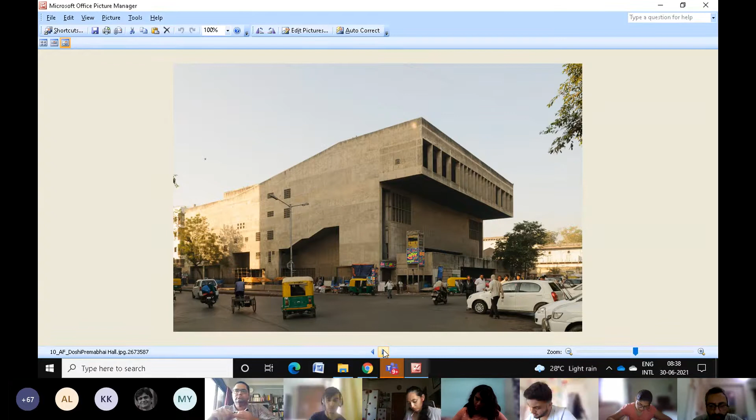But bottom line, Premabhai Hall's presence—though not very monumental—is felt and contributes to the identity of Bhadra Chowk. It has large blank walls flanked on its sides, with discreet openings, and the best part is how such a bold building has merged into the historic context.

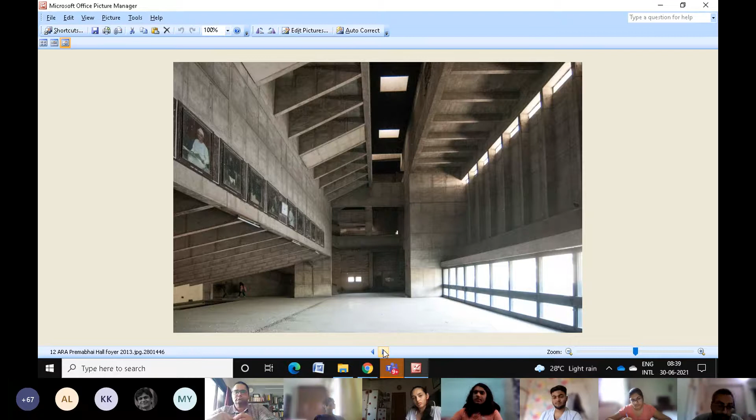The interiors are equally bold. If you look at the seating arrangement to the left, that's the balcony area—you see this cross section in most auditoriums. It has a small cantilever with a tucked-in space as part of the foyer, and double-heighted lobbies that allow you to take a breath, with a long strip window allowing you to look across. I'm trying to show what kind of scale is set here.

Doshi did other buildings earlier, the well-known Tagore Hall—if you've been to Ahmedabad, I'm sure you had a look at this. It also sits in Paldi, but its scale is not that of the neighborhood; it sits among bigger institutional buildings like those designed by Corbusier just opposite, and NID across the street, within the vibrant Paldi neighborhood of elite households.

The early 70s and 80s had their share—Delhi's Sri Ram Art Center, for instance. Most of our cities in the early 70s and 80s got these cultural spaces, modernist buildings of this kind.

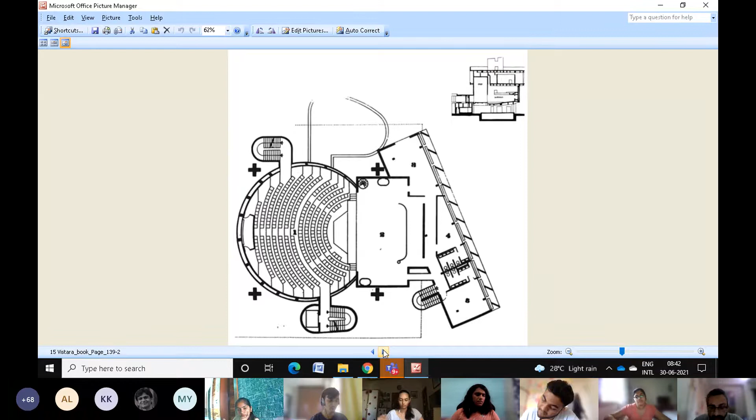But this is a building to be looked at in a manner of how the forms and the function come together to give the entire identity to the building.

There have been a large number of brutalist, modernist buildings. Allen Stein added the India International Centre at Lodi Gardens. All our great masters - Raj Rewal, Doshi, Correa - were practitioners of modernist buildings, and they contributed to that.

I'm not stressing a lot on the kind of modernist building because these buildings actually spoke of the 60s and 70s. However, in order to get the scale right, I did find this San Ginés Cultural Center - again a modernist building. But what interests me is the scale and how it sits in the neighborhood.

If you look at the building, it's a thin, linear building with a small seater auditorium at its rear, and it has plain levels. That is exactly why we've taken this kind of function, because half the building goes below the ground - the basement is equally important.

Learning about basements and rafts is important because some of its services, entry points, part of the auditorium, part of the stage - all these areas go below the ground. If they go below the ground, you're able to also work with the height of the building, so you're able to set the scale of the building.

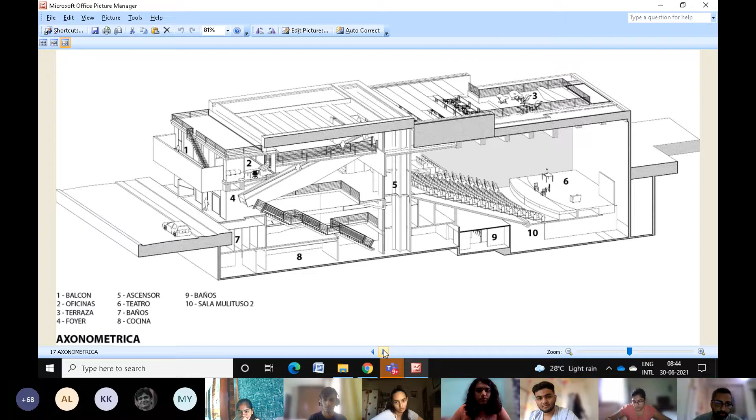Don't forget, how you'd look at this, you wouldn't understand that this is a huge auditorium block that is overpowering. No, this looks like a building that all can access. It's a building whose scale has been very carefully worked out to work for the neighborhood.

I gather that most of our students are in places that cannot afford large, sprawling, loud buildings because they are small two-tier towns. If you're in a two-tier town, you may have to get the scale of the building right, so that it doesn't overpower everything in its vicinity. Though we're seeing malls coming up in all our neighborhoods, and they take everything away - not to forget that they don't have any great architectural character or identity whatsoever.

I thought this is a fine example that spoke about how a large volume could be tucked into the ground and yet it worked well.

It has a vibrant lobby area in the front, other than the auditorium at the back. It has this very stark ramp. It has an office block - a small office block for the locality.

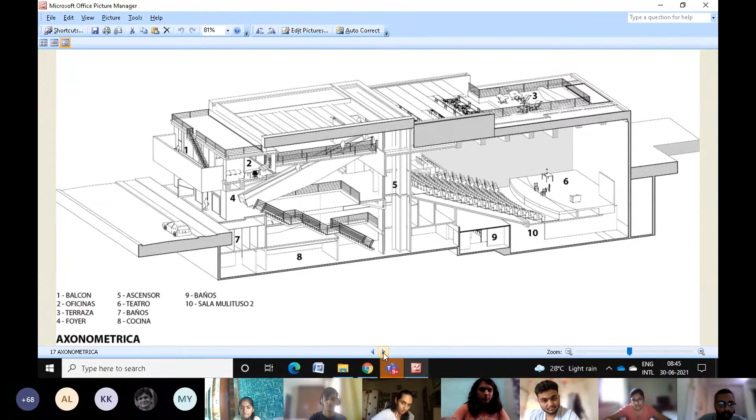What we're seeing as number two is a small office block that sits there. What you're seeing as four is a foyer with a large concrete ramp that takes you up, and a bridge that connects on the other side, and then the roofing system - a very interesting roofing system that allows the light to come in.

I'm showing this particularly one for the scale, the other for the use - a very distinct understanding and use of material and structural system.

We worked last year with a technology studio, and we found that it comes very naturally to students when they say that they want to use rough concrete - they do not want to plaster their surfaces, they'd like to work with form finish concrete, as it's called. If you're noting it down - form finish concrete.

We've had a legacy of form finish concrete, thankfully, because of Corbusier. You saw Premabhai Hall - entirely form finish concrete. Even the Sri Ram Center, and they got the identity of brutalist architecture because of the kind of character those buildings presented. They didn't have any color, they didn't have things to soften the building in any sense. They presented the building in the raw sense that they were actually constructed in.

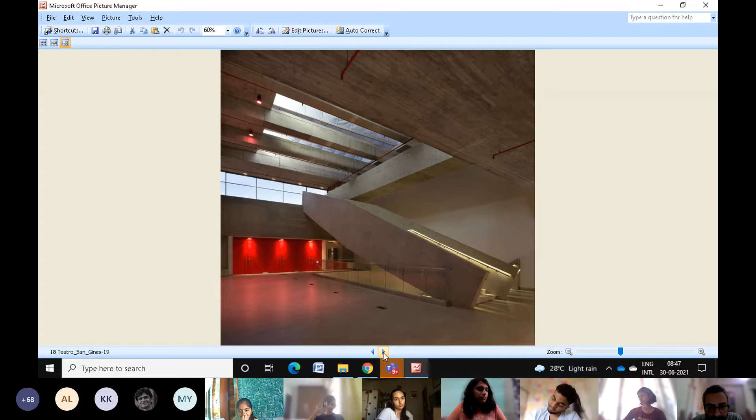This is one fine example of how you'd see a building in form finish concrete, and the kind of roofing systems that are there. You can see the kind of beams and the kind of openings that allow the light to come into this double heighted lobby.

And the office block tucked over the entrance overlooking the main street, along with the bridge that connects it. To the left is this bridge that's connecting from the auditorium foyer, or the balcony entrance, to where the ramp takes you up and then across the bridge, and there is an office that sits there.

I think if you all are dealing with cultural centers for your neighborhood, it would be nice to have a place where people could gather, find out about the kind of programs and information, with someone like a coordinator. I think these things do help.

But the 80s changed things in India. Our masters thought they needed to address architecture more relevant to India. This is very important for you to understand, which is why I thought I should cover this. From being modernist, which was a global movement, they thought of being regionalist. They thought that their buildings can afford to be modern, but their buildings can also afford to address the regional nuances of the place.

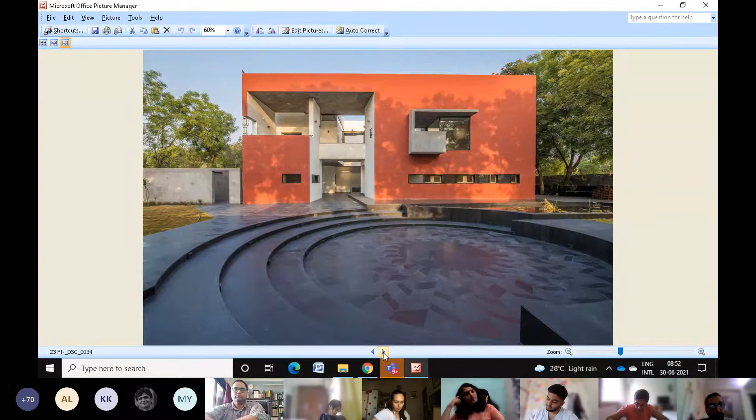So this is another art center in Ahmedabad, by Vastushilp Foundation. And if you look at it, the kind of colors - what I like most about this building is how it allows people to walk through the building. It is not a building that dominates, first of all, consider its scale.

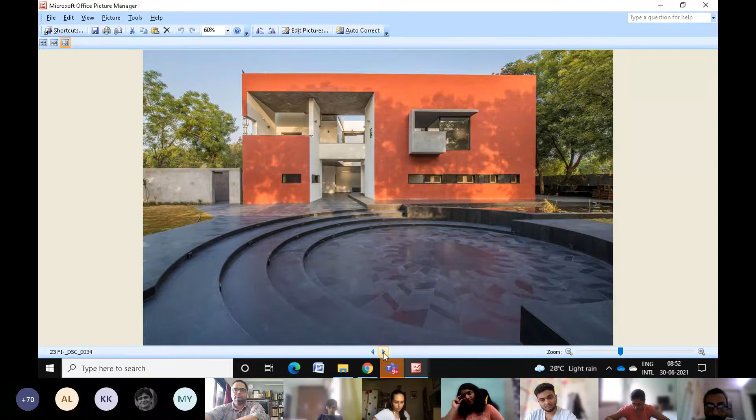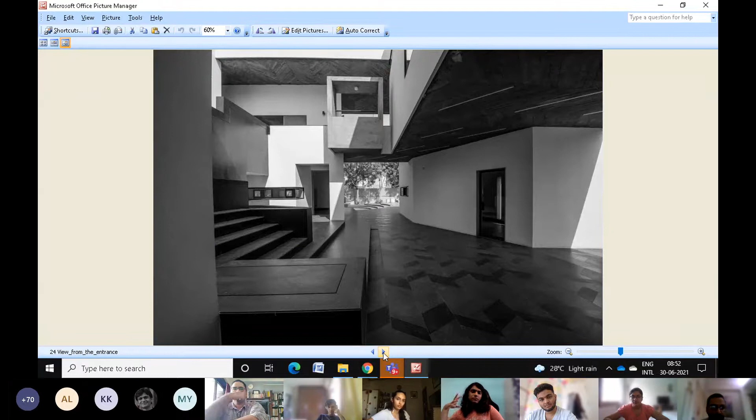It has the relevant mass to accommodate something like what we are looking at, a performance space, and things like that. So it has the mass, but it's not high, it is not very dominating. It has that subtle scale, it has those colors, and most important of all, it allows you to walk through the building. If you look at the courtyards as you walk through, there are overlooking balconies, framed views, steps that allow you to sit all across the building, and from the road too.

In this sense, Ahmedabad is well known for its red brick construction, being a hot and arid region with dry climate, and the architect has gone about creating minimal openings.

Most of our performance buildings have minimal openings because, in some sense, it's an introvert building, since all the functions do not require light from outside. Here too, if you see, there are minimal openings, and that's how it responds.

So it's a building that lights up in the evening, allows people to be around, have events if necessary. Just imagine if you have an event, you don't expect people to go back home right after. There would be some drinks or snacks served either at the start or end of the program.

This performance space we are seeing is something we are thinking about in terms of ticketing Sangeet programs for weddings. I'm sure everybody here is more Indian than I am in this sense.

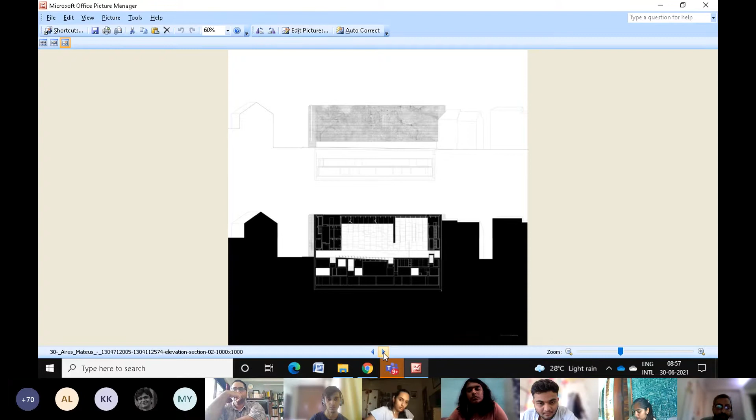Again, a large part of this building is tucked below the ground. If you look at all the activities taking place below the ground, it has a scale that is much more than expected for a neighborhood, so it has a large scale.

Okay, another building. So here we've seen how Raje contributes to IIM's.

IIM designed by Louis Kahn, and then the attempt to have an auditorium block added into the complex by Anant Raje, is a fine example of how this idea of brick, the arch, the postmodernist approach is there. So here is what we call postmodernism in some sense.

When we use classical ideas like that of the buttress and the arch very distinctly, and then again material regionalism, if you'd want to work with local materials if that is there to create. So this is again a building in its neighborhood. This is not a very loud building, not a very monumental building. It's a building that sits on the corner.

With distinct openings created and a large postmodernist identity created. If you look at it, the kind of clarity in the use of the concrete abutments, form finished concrete, and the brick arch in some sense, that most of America has seen, especially in the early modernist era. We've seen such work earlier during the Frank Lloyd Wright era too, by Louis Sullivan, when he created those large shopping centers.

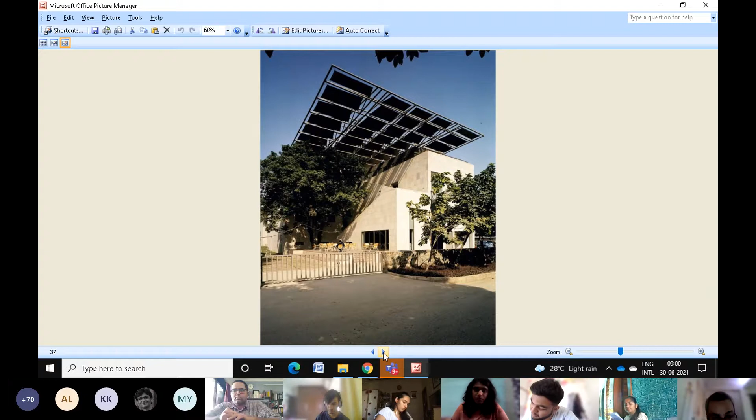It's a vibrant building, but very scaled to the neighborhood of the Lodi Gardens. It's very contemporary in the use of its material. Again, form finish concrete, strip windows, and this big roof trying to keep the building in shade and keep out the Delhi heat in some sense. A very modest auditorium in its entire complex.

In the entire complex, the building is comparatively large. If you look at it, the building beautifully lights up in the evening, with these big bold abutments, these wall abutments, and then the building lights up thereby reflecting the light from the roofing system that is there.

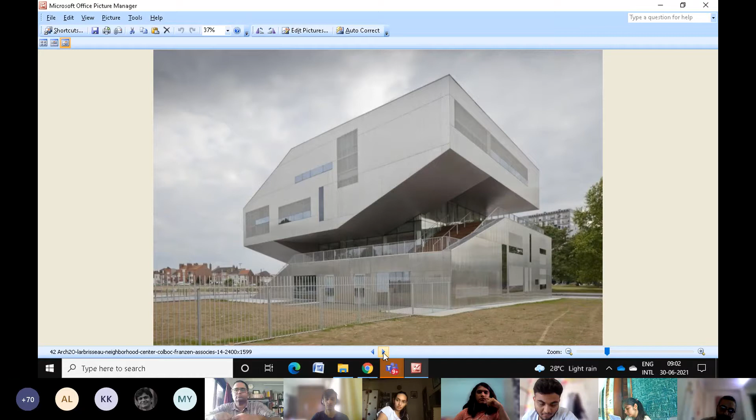Another building here, the L'Arbrisseau neighborhood center - this is the kind of scale that I'd like to show you. Here the slope of the auditorium, the entire slope, very distinctly forms the profile of the building. You can know how the auditorium sits, and you can clearly gather that it's not a large building. The seating is not large, but the profile of the auditorium stands out.

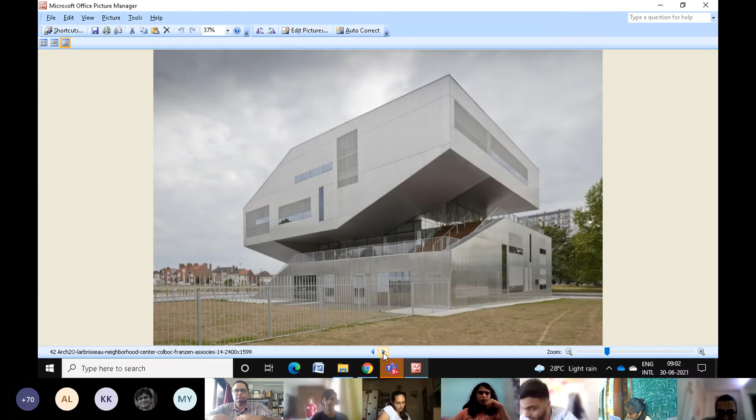Most of the time, the profile - most architects try hard, and that is what I'm coming to next - is how do you work with the planning of the building? Here particularly the architect takes the profile of the auditorium in its section and uses it, sets back and uses this space in between.

So it's a step-up building, a building that you step up. If you look from the right, if you can see my cursor, right from the left it walks up and gets you into the stomach of the auditorium in some sense. And the seats go up. I do not know if you ever entered an auditorium in the center where the seats are all around you, and then you either go down to the seats or up to the seats. This is that kind of auditorium, but the profile contributes to the entire identity of the building.

That's the kind of building that sits - you can see the girders that actually help in spanning and cantilevering the building from the central core. A very fine building, the L'Arbrisseau neighborhood center, by Colboc Franzen Associés. I like the building, considering most of us try to hide the profile of the auditorium block. Here he has brought it to the fore and it contributes to the identity of the neighborhood, a very distinct building - it stands out, and that's how he's attempted it.

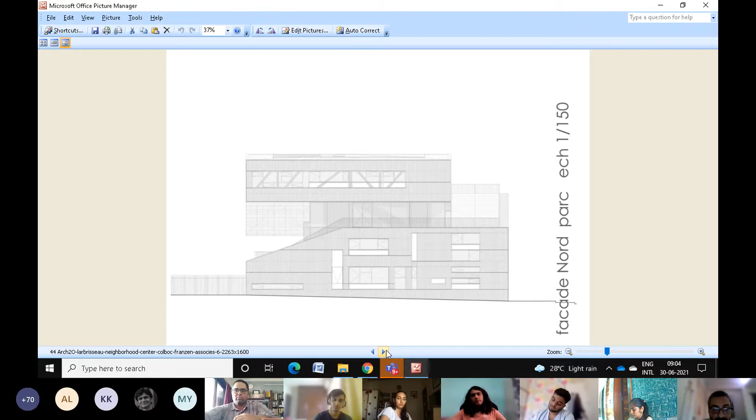You don't have trees, people, skylines, or birds in these drawings. The sections and elevations for working drawings come with all the details that are there, such that the contractor executes it without any flaw.

So that's the building that I thought was important to set the scale right.

Now I'm coming to the next topic: an auditorium block usually comprises a wedge-shaped block in plan, and in section it typically looks something like this, with a step down, maybe a projection room at the top, the stage area, and things like that. This is a typical plan, and this could be a typical cross section.

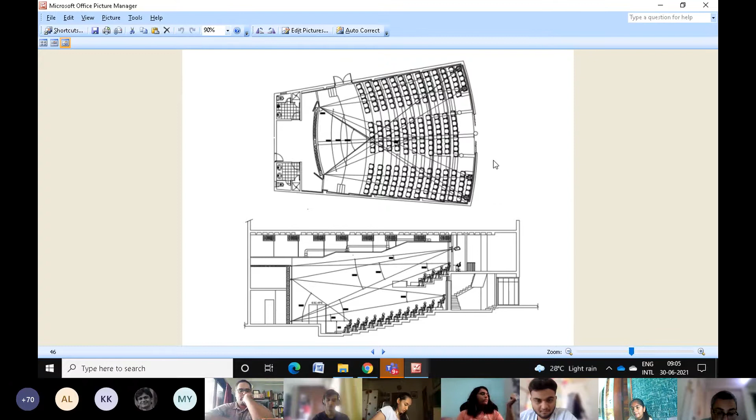What I'm trying to say is that most of the time, other than the last project we saw where the profile of the auditorium is accentuated and made into an identity for the building, most of the time we get the opportunity to build around the auditorium.

What I'm trying to say is that this kind of project usually has something called the core and something called the shell. An auditorium block need not be clearly identified from the outside, and the scale of it need not be so dominant that it takes away the scale of the neighborhood. How's that?

Usually the audi block can afford to sit in the center as a core, and there could be peripheral areas like fire escapes, staircases, toilets, passageways, movement areas, services, AHU rooms - all kinds of things happen in and around the auditorium block, because it's a largely serviced building with attention paid to fire escape and similar requirements.

So the audi block, if you look at this, that's the audi block - here's a rectangular auditorium block. I'm sure Meenal, through her lectures in acoustics, will talk about various types of auditorium designs or layouts.

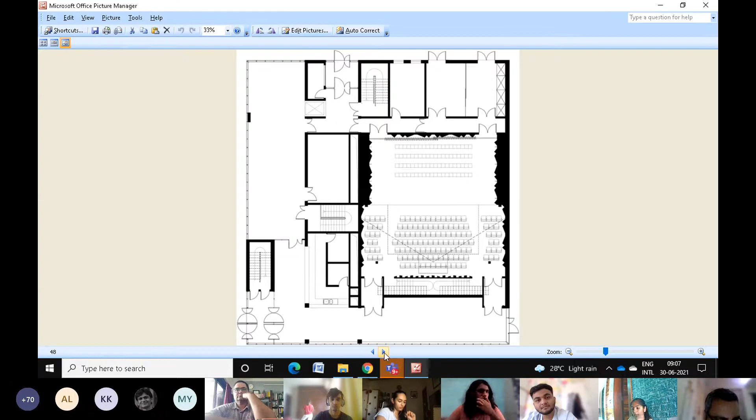What I'm trying to make you understand is that this kind of identity I spoke about - be it postmodernism, modernist, regional vernacularist, abstract regionalist or vernacular - the identity of the building can actually come from the shell you design. The core of the building in plan can be as functional as you'd want, whether it's a rectangular or wedged auditorium design.

Like this particular building - it's a rectangular auditorium but sits in a circle. So the shell is the circle, the core is a rectangle. Auditoriums can be designed this way.

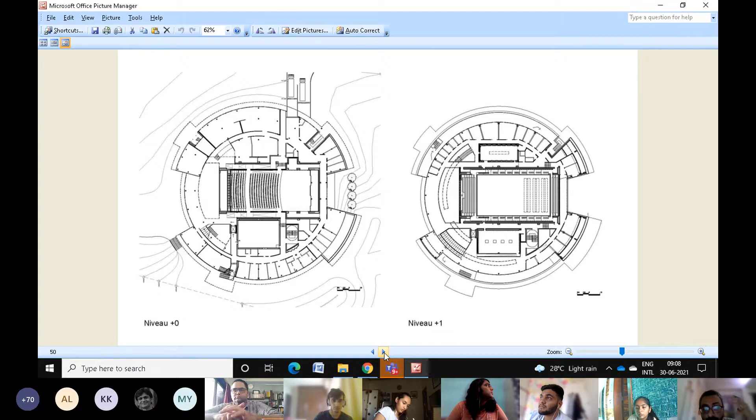Depending upon your plot, and depending upon the kind of buildings I've shown you earlier, and the kind of identity you'd like to set for your neighborhood, your core and your shell can afford to be different. Your core can be very functional, but your shell can vary according to your ideas to contribute to the kind of identity you'd like to set for the neighborhood.

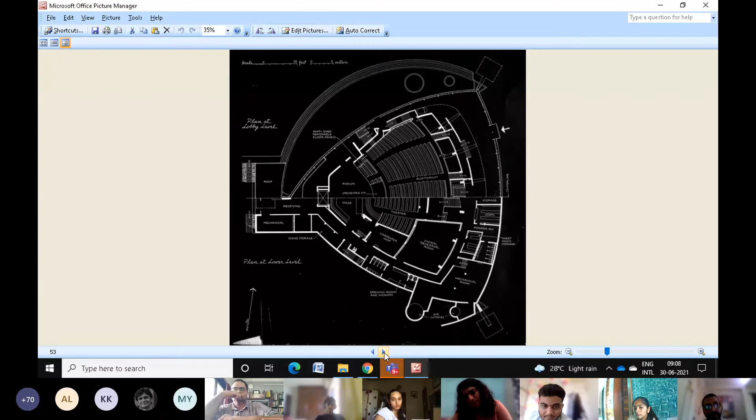So look at this particular form of the plan and the kind of shell it takes. This is more wedge-shaped, going in line with the auditorium layout, but the shell is yet a different part of the building other than the core of the auditorium.

Look at this - I'm just showing you a set of random plans. If you go on the net and look at well-known auditorium plans or cross sections, Arch Daily and Architizer all have huge compilations. That's exactly where I got huge compilations of well-known auditoriums across the world, whose planning and sectional understanding has been really worth looking up to.

You have these two weeks to look at these and get inspired and make good use of it. Here is a rectangular auditorium in its core, but look at how the offsetted shell is taken up - the shell can then lend character to your neighborhood in whatever ideology, be it contemporary, modernist, regionalist, or postmodernist.

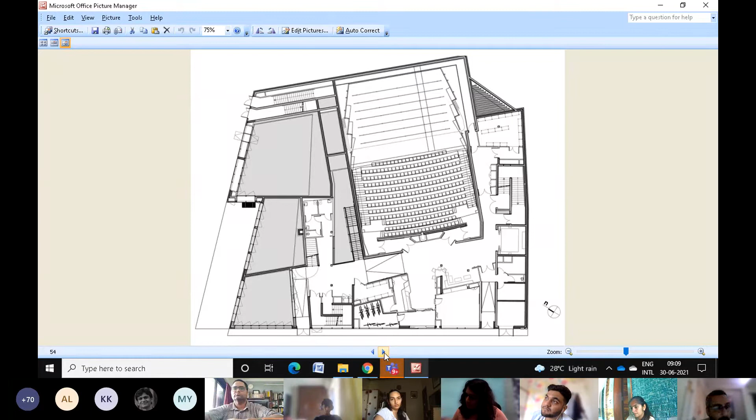I'll be showing you a couple of high-tech buildings.

Look at this central rectangular auditorium as compared to the shell. This building reminds me of the Ruby City Center Hall I showed you, the red building with all these exaggerated corners. This plan could have very well been something of that sort, where the core of the plan is rectangular, and you look at the two shear walls that run along the sides of the auditorium.

In some sense, these walls look to have completely supported the rest of the shell. Look at the two dark lines that run parallelly, that actually are the side walls of the auditorium. When we talk about auditorium design and roofing systems for such large span buildings, how the walls behave is all important.

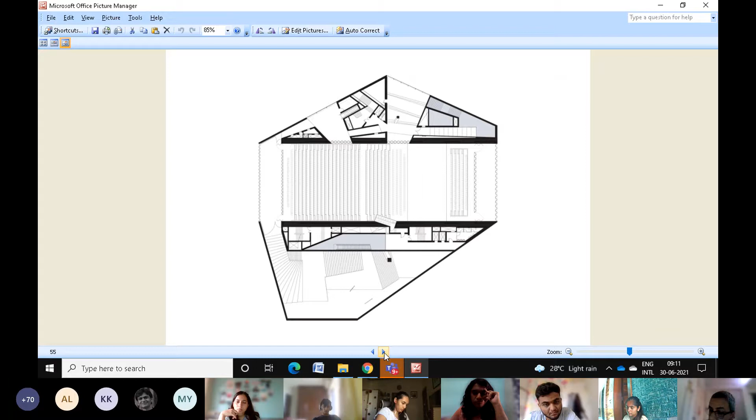So auditoriums are not only about plans, but the plans have a very distinct identity of core and shell. The auditorium building, in that sense, is an entire building to be looked at for its cross section. So the cross section of the building, and this is the building in question.

So what are we looking at? If I have to summarize, our project is a tight neighborhood building, in some sense, a building that sits on a tight neighborhood plot. But it's more complex in section than in plan. We are not looking at a spread out plan; we are looking at an urban plot, a tight plot onto which you set this building.

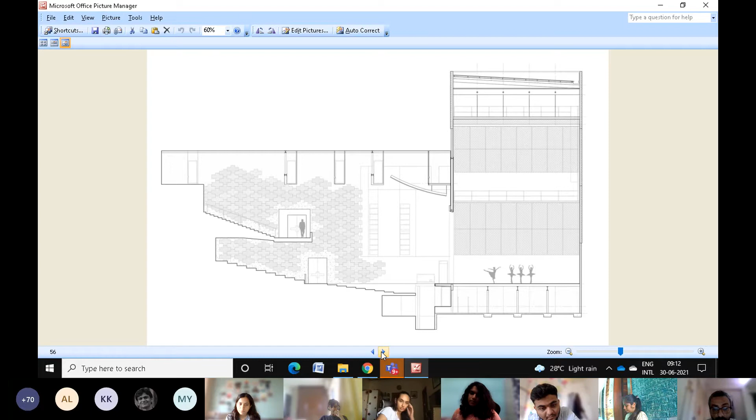I'll show you a couple more, and then naturally the seating that is there. This seems to be a larger auditorium. Now the auditoriums you see here may be larger, but they are shown to you for their sectional complexity. Here is another building with girder systems on top to take care of its flat roof, in some sense.

But again, if you look at this, you can see something we could call an orchestra pit, in some sense. These are auditoriums that are, yeah.

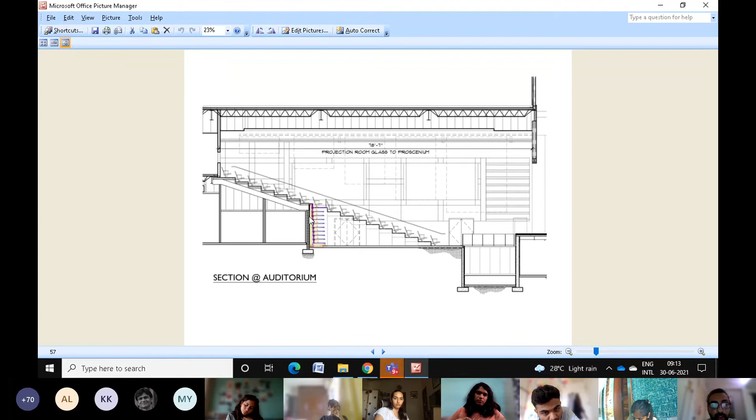And then how the seating sits, and how you take care of the spaces below the angular areas. Again, girders. You can look at how the girder is used to take care of the balcony areas, as well as how the girders are used to take care of the roofing systems and help you get a catwalk and suspend the acoustical panels.

So this building is all about sections. Finally, once the design is resolved, your building is going to be looked at as cross sections and nothing more. The project is going to end with elevations and cross sections, and nothing more than that.

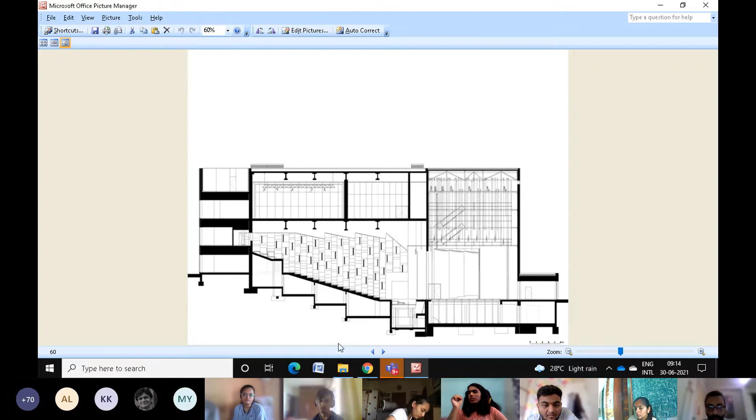Look at another example of a usable space above an auditorium.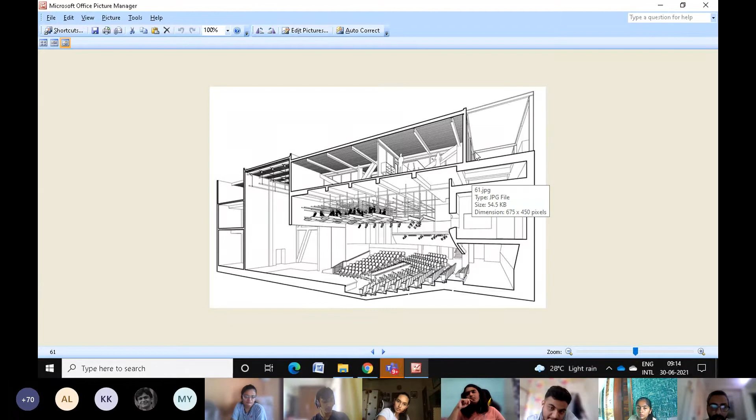With heavy duty beams that run across, that allow you to suspend the flooring system. There's a big void there to accommodate the auditorium, but naturally you top it all up with a floor that brings the block to the desired effect that you want as a project. That's all in your hands.

Staggered roofs, all kinds of staggered roofing systems, folded plate, staggered roof. When I looked at this, it reminded me of Tagore Hall. I don't know if you ever visited Tagore Hall. Very good example of core and shell. This is the core of the auditorium. Look at it, they have visited Tagore Hall. Very nice, this is the core of the auditorium.

That's exactly what I'm trying to tell you, that the auditorium can have a complete shell, and Doshi has used the idea of the folded plate structural system. From outside it doesn't appeal much, but it works wonderfully well. These folds work wonderfully well in order to create the shell, and it's a portal-cum-folded plate. What you see here is portals that are actually coming down, and from the portal are folded plates that are actually helping in creating the entire shell or cover to the building, whereas the interior core sits completely isolated, having nothing to do with the shell.

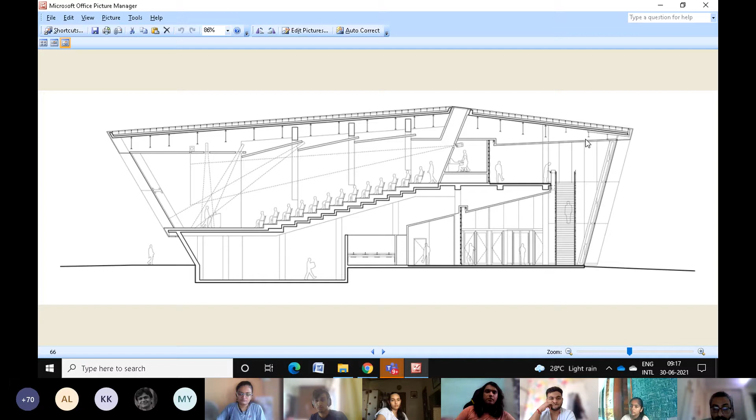All kinds of roofing systems that lend character to the building. Don't forget, this is one homogeneous building in some sense - not everybody may make the building walkable with internal courtyards and all that. But yes, these are the forms of the buildings that exist.

Look at this building - again, a very small auditorium. This goes with the high tech idea. If you look at this building, it reminds me of Renzo Piano and Richard Rogers' Pompidou Center, or the Lloyd's building, where the entire ducting system takes precedence over the character of the building. That's your Audi block in some sense.

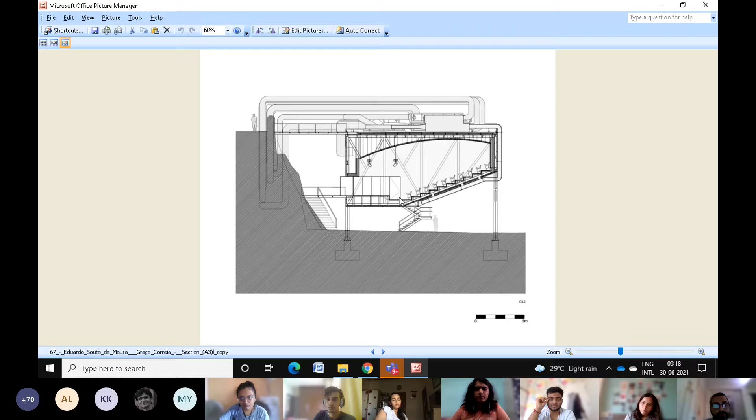Look at this in section - that's your Audi block with these metal support systems. And look at these ducting systems that are there - heat and cold ducting systems. That's how the auditorium sits above the ground, and that's the kind of high tech style that was called high tech in the 80s, when people designed buildings like that, with their services exposed.

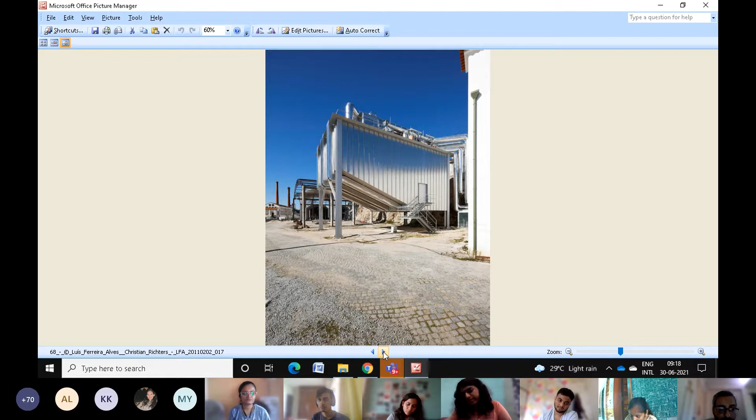I'm sure all of you have heard of Pompidou Center, where the big ducting systems and shafts are visible for all to see. A bit better revised version was Richard Rogers' Lloyd's building, again in London. This is by Christian Richters - Luis Ferreira Alves - that creates a new identity.

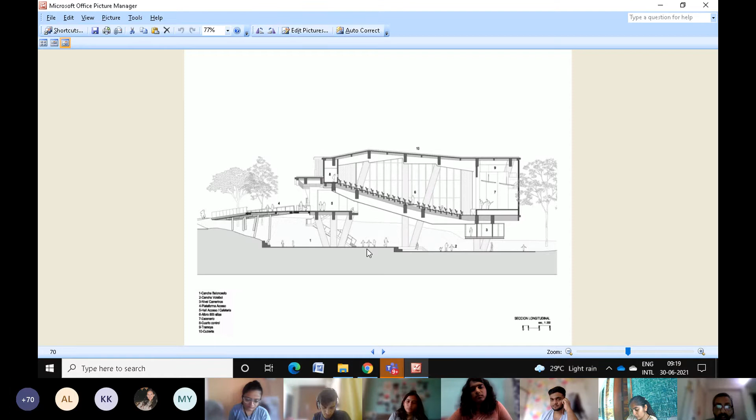Look at this building - it sits above the ground. This is the kind of auditorium block that sits above the ground and opens the ground for a public plaza. I'm sharing ideas in some sense - I think that in the first class, if you can share ideas, it can help you start off well. Look at that, building sitting above the ground, opening the plaza onto the floor.

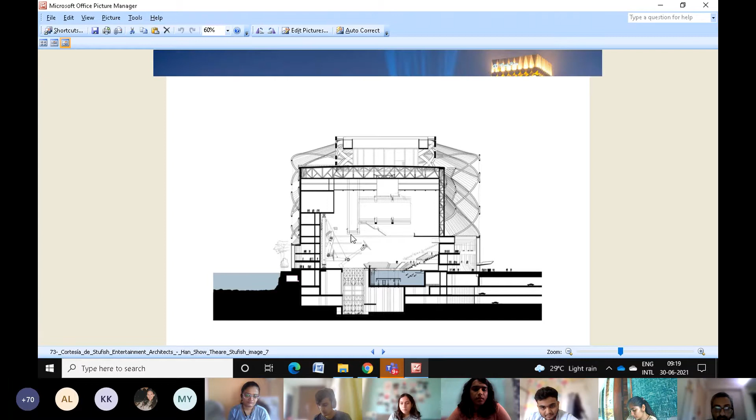Look at this cross section - a stacked cross section of an auditorium. That's the core, and look what happens along the shell. God save me if you'll start designing like this, but yes, that's how it is done. That's the stacked auditorium - it's a linear stacked auditorium with a lot of space for events, or more like a show that uses its height to create events, and that's the kind of building that is there.

Now I gather most people are in two-tier cities. Yeah, and when you work in two-tier cities, you do not have that kind of scale. You may want to work with a scale that actually is very modest to the kind of neighborhood that is there.

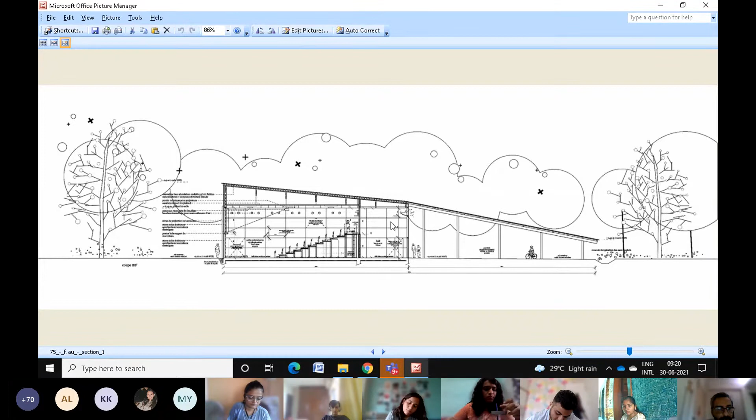This is the simplest of cross sections that I've seen, with a foyer, an open, semi-covered foyer. That's the kind of scale. Perhaps some of this kind of scale may be helpful to look at your neighborhoods. I wouldn't know in the kind of neighborhood you're looking at.

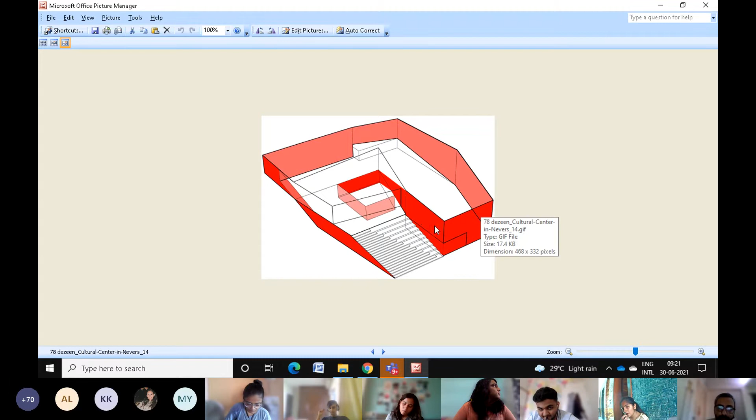That's the kind of plan that is there. It's a larger plan compared to our program, because it not only has an auditorium block, it's a neighborhood center, so it has many more other rooms. I'm sure we can give you a leeway for some rooms that you believe your neighborhood could have.

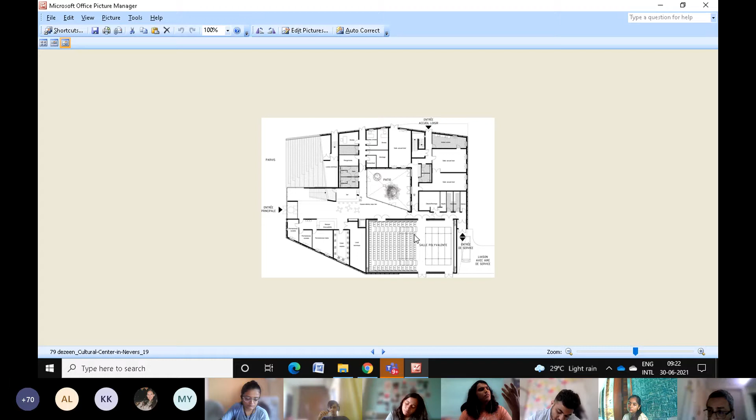Yeah, it could be perhaps a counseling center. It could be perhaps a gym. It could be perhaps something small, some offices to help the unemployed, or some counseling, something like that. We've kept that kind of leeway so the building can accommodate a couple of rooms.

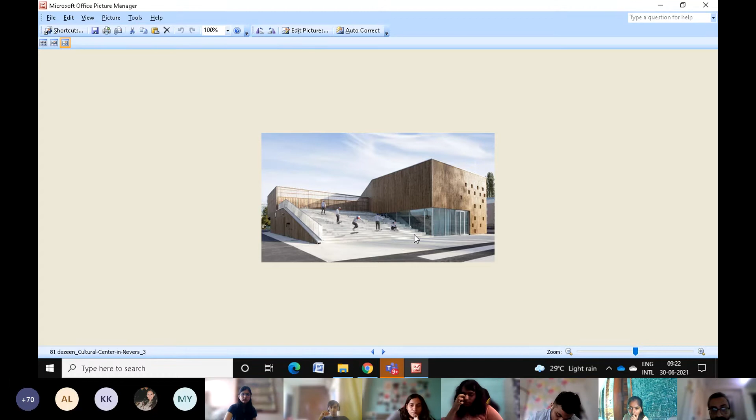That's your central courtyard to that building, and that's the kind of steps that is used by the youngsters. It's a very subtle building that sits in your neighborhood. Though it has a large layout with the courtyard inside, this is a building that very modestly sits in that kind of neighborhood.

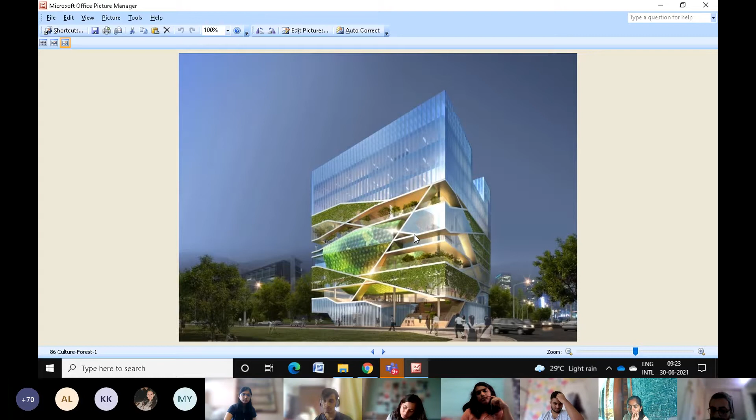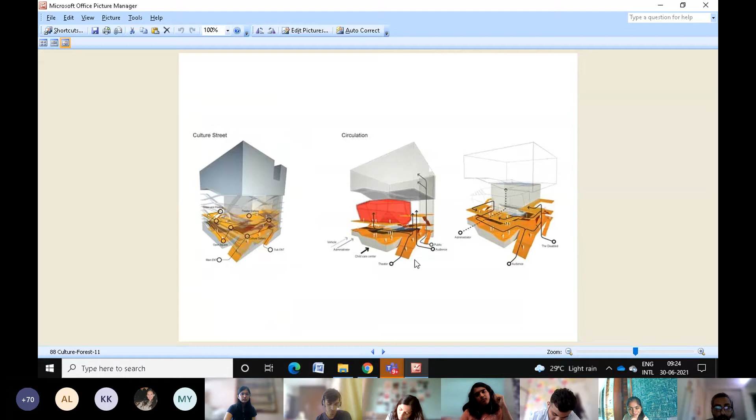Again in an urban setup, it's the kind of building I'm talking about, being stacked, complex in section, ground floor largely public, open for public interface. And as you go up, you have all these kinds of skins and landscapes and things like that, and it accommodates an auditorium block in the middle of the building.

That looks something like that. It's a proposal. What I'm trying to say is that you can have very strong concepts like this, a sustainable idea, a sustainable and green building sitting in the neighborhood.

If you're looking at something like that, where the building responds to the climate, it creates its own food, it creates its own landscape, and then how you stagger it, create pockets. It's called a culture forest, literally like a cultural center in the middle of the city.

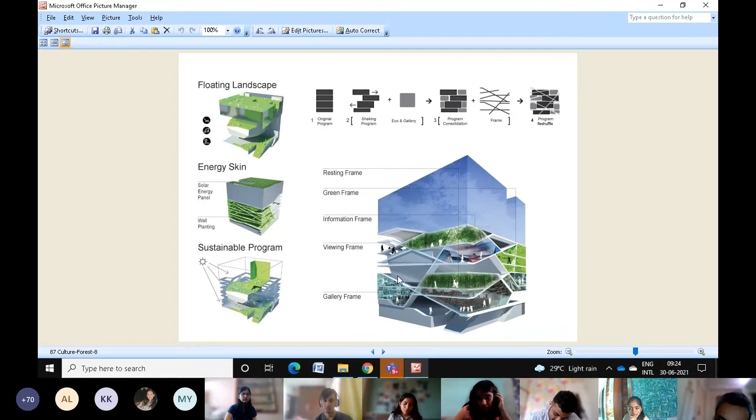It's more scaled for the city, and I thought I should end the project with this.

Before I end, I'll take another 3 to 5 minutes of your time and show a project. I would like to show a project that is all about flexibility, and let me first show you the building before I speak more about it. I think the video itself will explain it. Just bear with me for a couple of minutes.